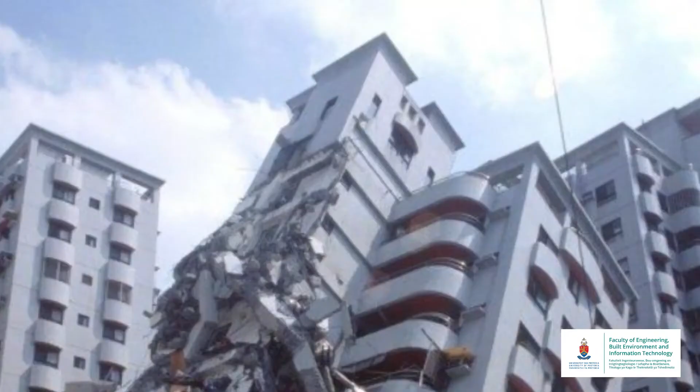Today, I will talk to you about the main research activities of my team and the opportunities offered to future postgraduate students and researchers who would like to join us. The main objective of our research is to provide the tools needed towards establishing a safer and sustainable built environment.

To achieve this goal, our research performs advanced numerical modeling, machine learning algorithms, and experimental testing, in collaboration with renowned universities across the world. Students and researchers under my supervision gain deep knowledge in computational mechanics, and develop advanced skills in earthquake resistant design of structures, where the design and assessment of retrofitting and strengthening is also extensively investigated.

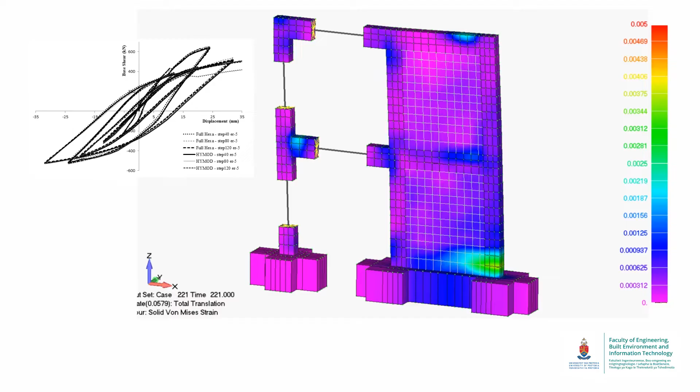One of our main research interests is the development of advanced numerical tools for investigating and assessing structures under extreme static and dynamic loading conditions. This is an animation of a two-story reinforced concrete frame under extreme cyclic loading conditions. The von Mises strain contour indicates areas of damage during cyclic loading. According to the nonlinear analysis, the frame was found to develop enhanced hysteretic behavior.

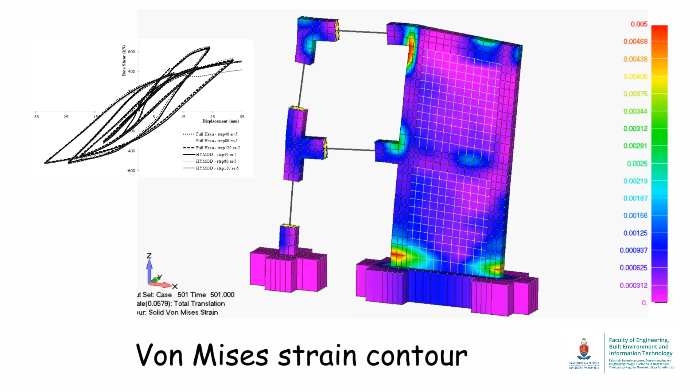When using Reconan FEA, a researcher has a significant advantage from the computational efficiency of the developed algorithm, which exhibits numerical stability and robustness, allowing this type of analysis to be performed within minutes.

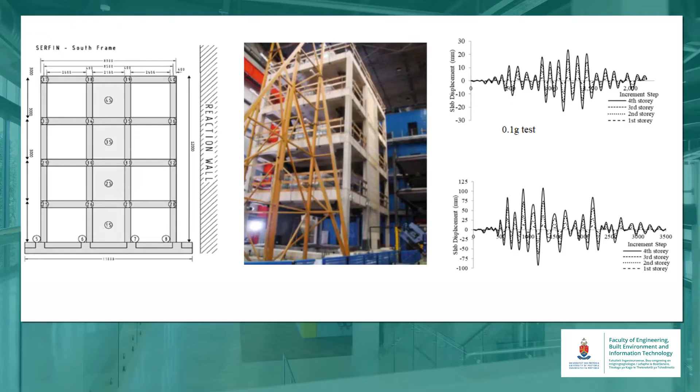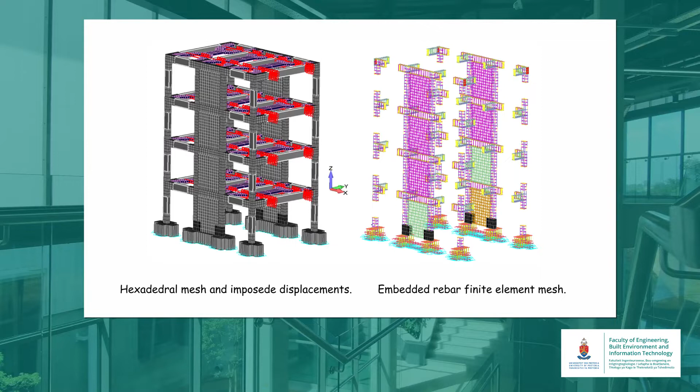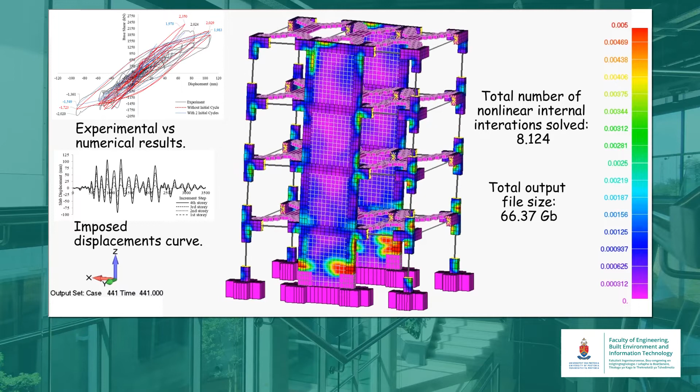This is also why investigation of full-scale structures through 3D detailed modeling analysis is now computationally feasible, as in the case of a 4-story reinforced concrete building retrofitted with infill shear walls and carbon fiber reinforced polymer sheets, tested under 3 different levels of seismic excitation. An animation of the von Mises strain contour can be seen as it resulted from the nonlinear cyclic analysis. The cyclic nonlinear solution algorithm required a total of 8,124 internal iterations to solve this numerically demanding problem, with a total computational time of 47 hours.

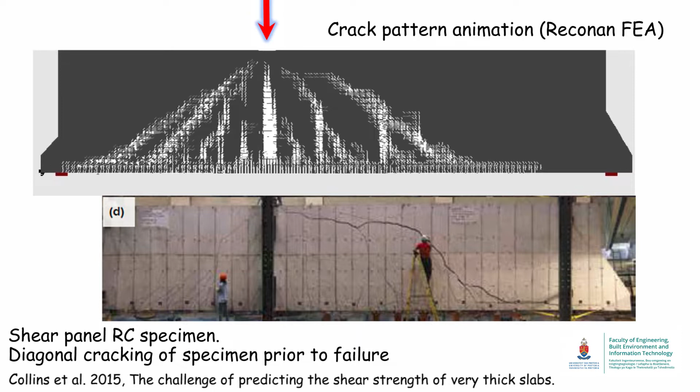Another extremely demanding problem is predicting the shear capacity of reinforced concrete beams without stirrups. The Toronto shear panel, a large-scale experiment of a 4-meter-tall beam, was numerically solved under cyclic loading conditions, accounting for loading and unloading of the specimen. The crack pattern animation resulted from the nonlinear analysis. It's easy to observe that the developed algorithm captures phenomena such as opening and closing of cracks and material deterioration, where the predicted crack pattern was found to be in good agreement with the experimental data.

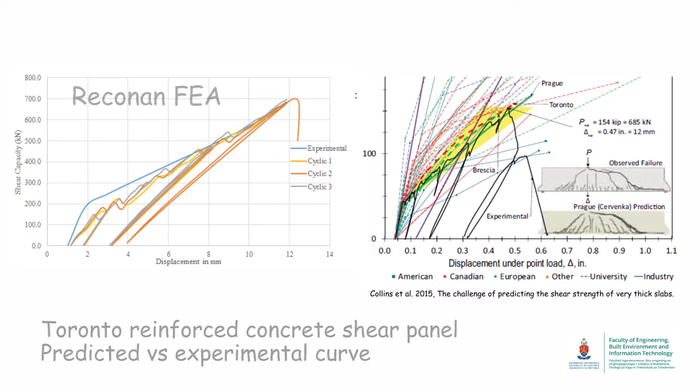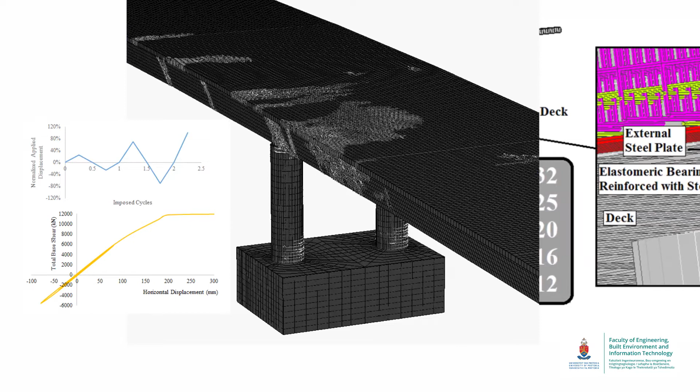To demonstrate the software's ability to analyze large-scale models with robustness and numerical stability, this 100-meter span reinforced concrete bridge was analyzed under cyclic loading conditions. The crack pattern animation illustrates the optimum numerical handling of thousands of opening and closing cracks at each displacement increment. This shows that a postgraduate student or researcher who wants to perform full-scale assessment of bridges and investigate different retrofitting methods now has the ability to do so.

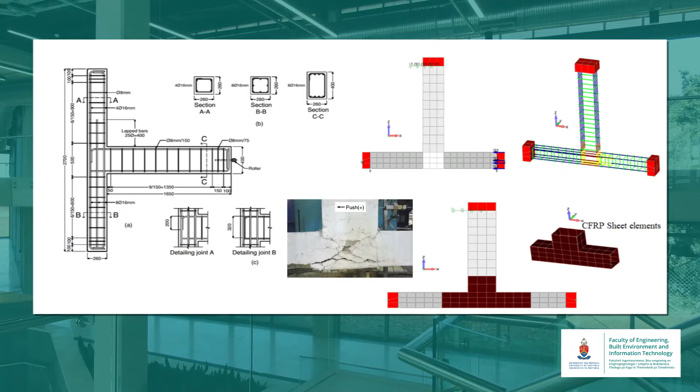Referring to retrofitting methods and the assessment of strengthening efficiency, the algorithm has the ability to simulate the mechanical response of reinforced concrete structures retrofitted with carbon fiber reinforced polymer sheets.

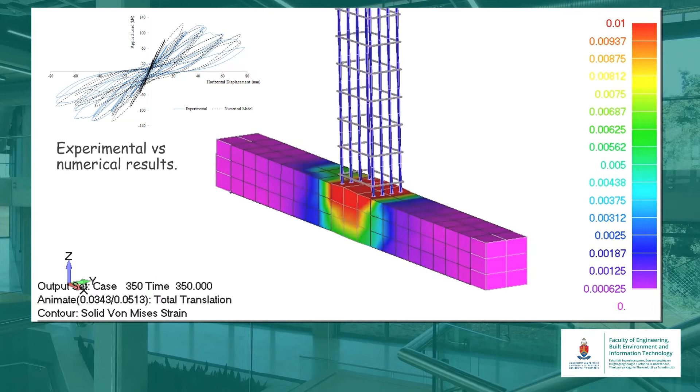This is a model that was developed to capture extreme nonlinearities of a retrofitted reinforced concrete joint that was designed to exhibit significant cracking and slippage. This is the comparison between the numerically derived curve and the experimental data.

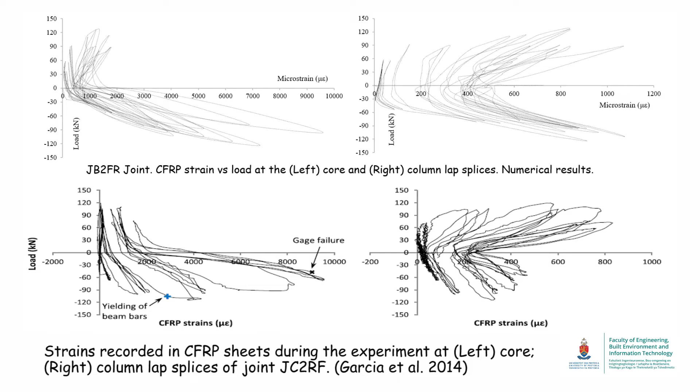It is important to note that this modeling method was also applied to full-scale structures for the investigation of the optimum retrofitting design, a very interesting research subject for those that would like to get involved with the strengthening of existing buildings and bridges.

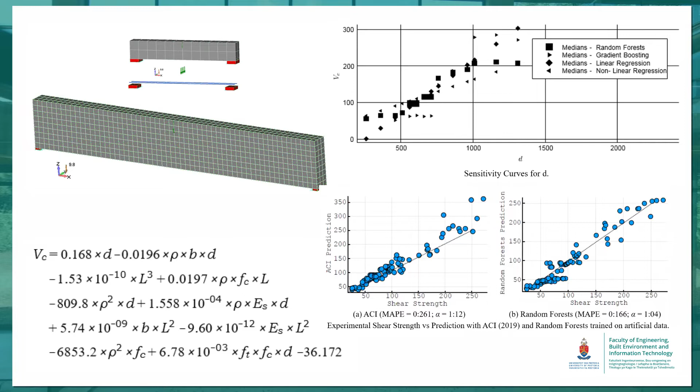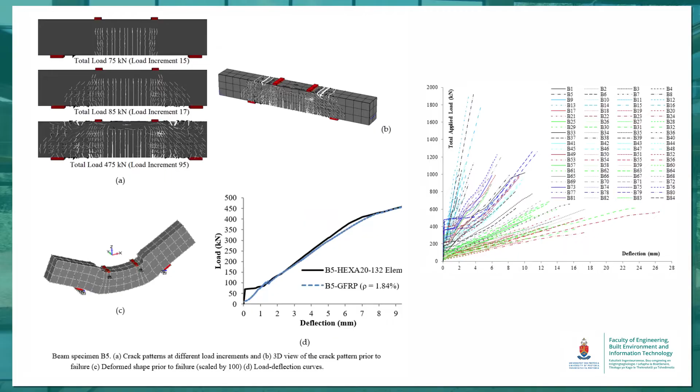Currently, there is a significant amount of work performed with artificial intelligence and machine learning algorithms in developing design formulae. A work which is currently under review foresaw the development of a large database of numerical results from reinforced concrete beams without stirrups. This database was used to train a predictive model that was then validated through actual experimental data. The same approach was used to develop predictive models for deep beams reinforced with FRP bars. It was found that the developed models exhibited higher accuracy in predicting the shear capacity of reinforced concrete beams compared to existing design formulae.

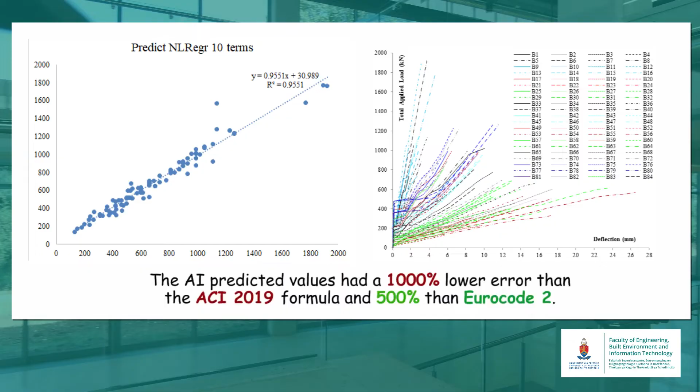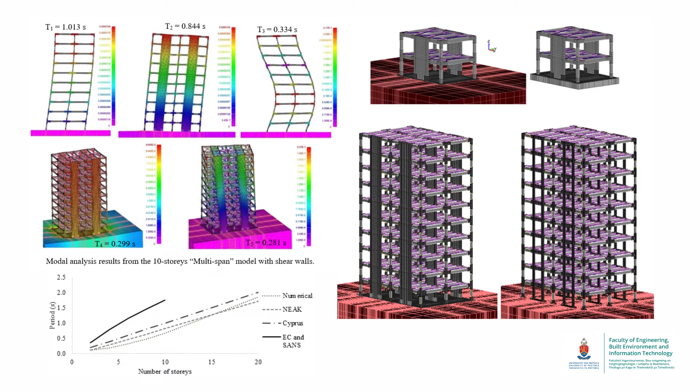Furthermore, the model algorithm of ReConAn FEA was used to generate a database of fundamental periods for different structural and soil geometries. This database was used to train models and develop a new fundamental period formula that accounts for both cases with and without the effect of the soil structure interaction phenomenon.

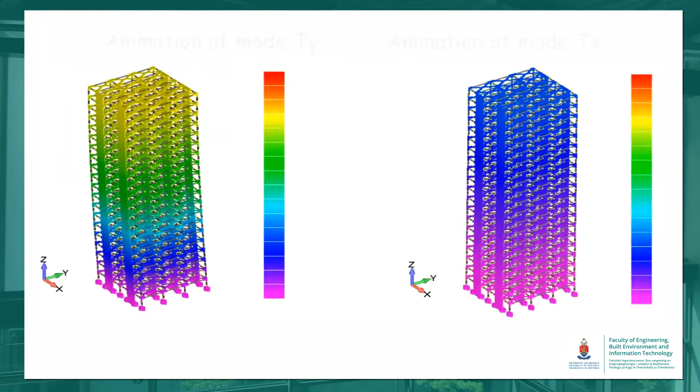We are currently looking for a postgraduate student that will undertake the task of increasing the current database through additional analysis, extending the spectrum of structural geometries and types that the proposed formula is valid for. We also plan to take into account the contribution of infill walls, while further validating the ability of the proposed fundamental period formula to predict this dynamic feature of our structures.

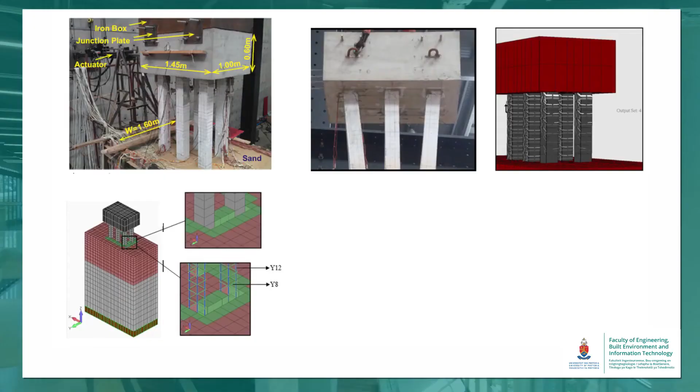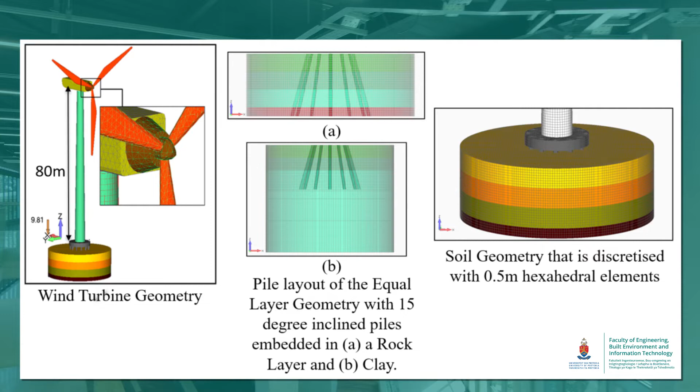Another significant activity of our team is the investigation of the soil structure interaction effect on different types of structures. Recent work currently submitted for publication investigated the SSI effect when analyzing wind turbine structures founded on soft soil. The investigation foresaw the study of inclined piles, where the optimum inclination was found to be 10 degrees.

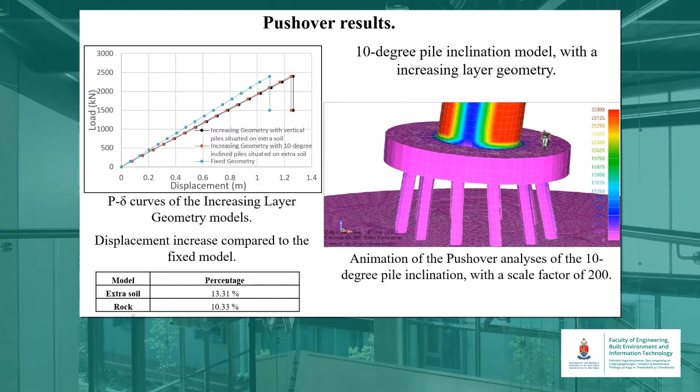Additional research work can be performed in this scientific area by investigating different wind turbine tower geometries, soil profiles, and foundation systems. In addition, the nonlinear dynamic analysis of full-scale structures is a research objective that can be undertaken by a future postgrad student.

Furthermore, my research team is planning to develop the required tools for creating smart monitoring systems that will foresee the use of real-time data, used to provide real-time models with the ability to perform risk assessment analysis. This is a very challenging but extremely interesting project for PhD and postdoctoral candidates interested in joining us.

We are currently looking for candidates that will be involved with the monitoring and assessment of structures through the use of virtual reality technologies, state-of-the-art modeling, and digital twinning.

Before closing this short video on the advantages and opportunities that a future postgraduate student or researcher will have by joining our research team, it is of significant importance to show our new state-of-the-art civil engineering facilities that were recently constructed here in Pretoria.

Our engineering facilities, a new building that we recently constructed, will provide our current and future postgraduate and research students the best facilities currently found on the African continent.

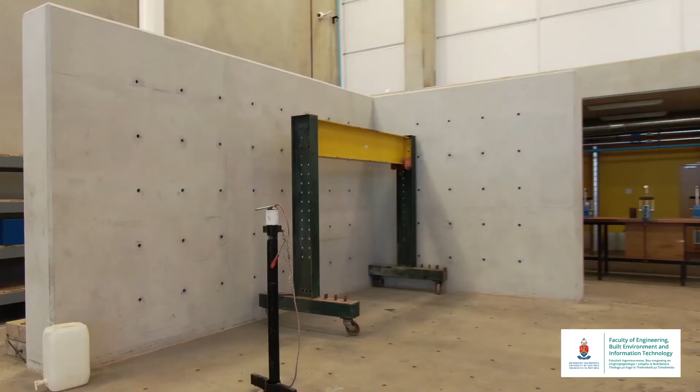This is part of the concrete laboratory, which has a strong floor, ideal for large-scale simulations and experiments on reinforced concrete structural members and structures.